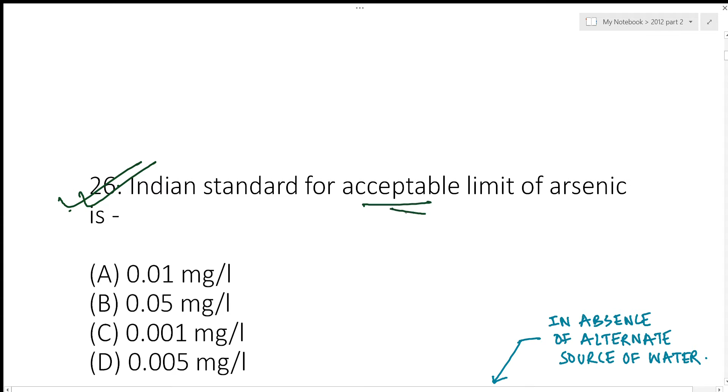The first question is: Indian standard for acceptable limit of arsenic is? The Indian standard acceptable limit is 0.01 milligram per liter for arsenic, and the permissible limit for arsenic is 0.05 milligram per liter. There are two limits in Indian standards: one is the acceptable limit and the other is the permissible limit. Only in absence of alternate sources of water is the acceptable limit relaxed to the permissible limit.

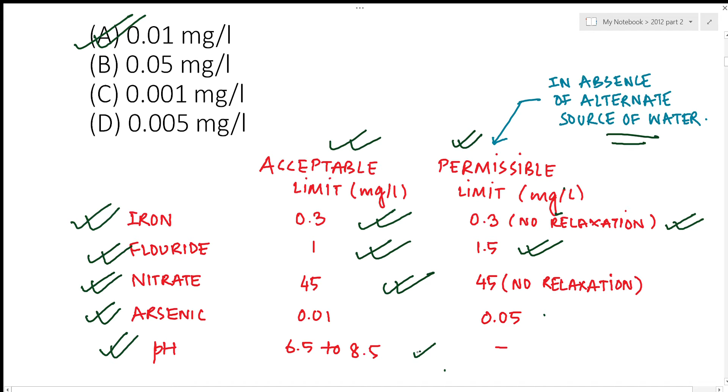For iron, the acceptable limit is 0.3 milligram per liter, and the permissible limit does not have any relaxation. In case of fluoride, the acceptable limit is 1 milligram per liter and the permissible limit is 1.5. For nitrate, it is 45 milligram per liter in both cases. And for arsenic, you already know. For pH, the acceptable limit is 6.5 to 8.5, and there are no relaxations for the permissible limit.

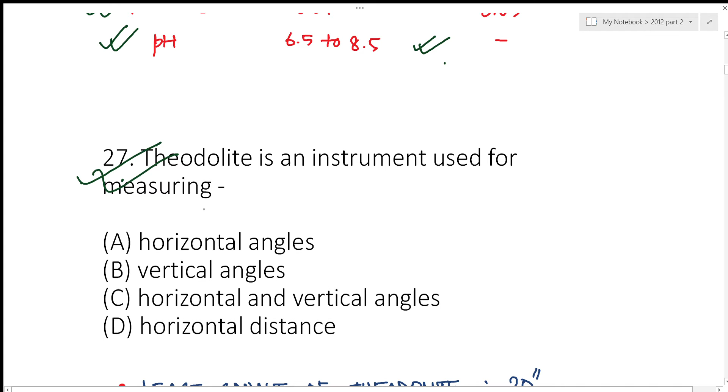The next question: theodolite is an instrument used for measuring? Theodolite is an instrument used for measuring both horizontal as well as vertical angles. The answer should be C.

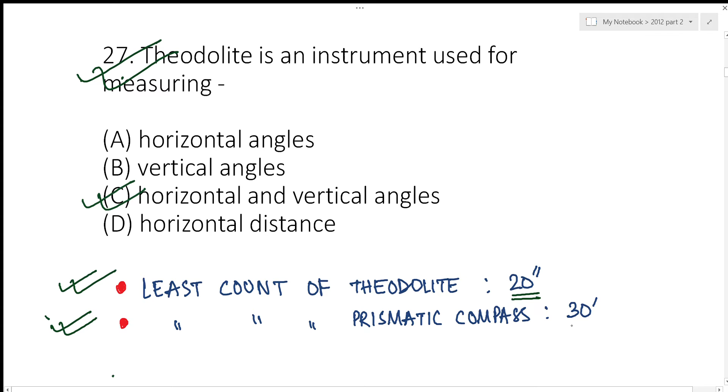A connected question from theodolite is: what is the least count of theodolite? The answer is 20 seconds. Also, the least count of prismatic compass - you should know this - the least count of prismatic compass is 30 minutes.

The next question: while submitting the tender, the contractor is supposed to deposit some amount with the department as guarantee of this tender, which is known as? The answer should be earnest money.

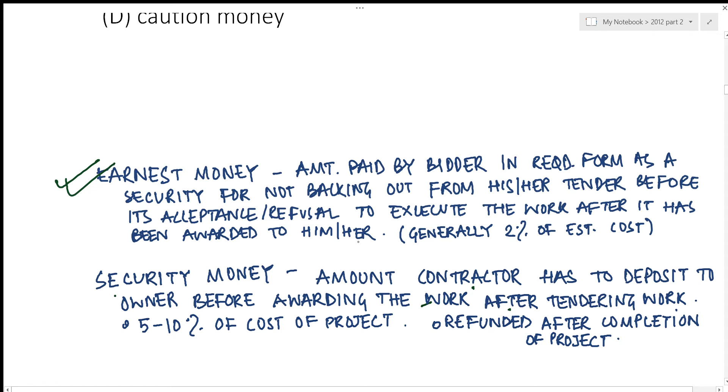Now let's go into details about earnest money and security money. Earnest money is the amount paid by the bidder in required form as a security for not backing out from his or her tender before its acceptance, or refusal to execute the work after it has been awarded to him or her. Generally, it is 2% of the estimated cost of the project.

Also, what is security money? Security money is the amount the contractor has to deposit to the owner before awarding the work after the tendering process, and this is around 5 to 10% of the total cost of the project. This money is refunded after completion of the project, but if the owner does not find the work satisfactory, this amount is not refunded to the contractor.

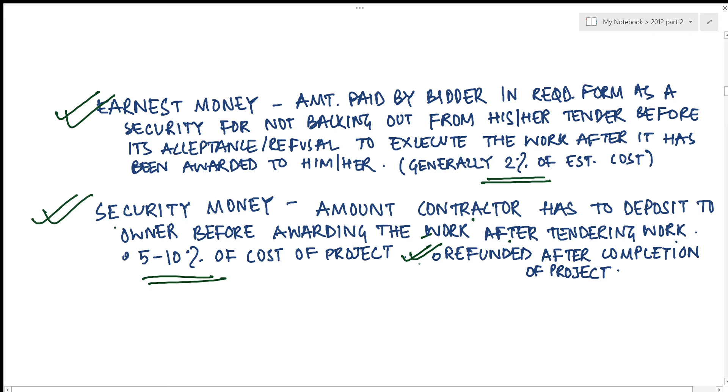Next question: an external corner in brick masonry is called? The answer should be quoin. The external corner in brick masonry is called quoin.

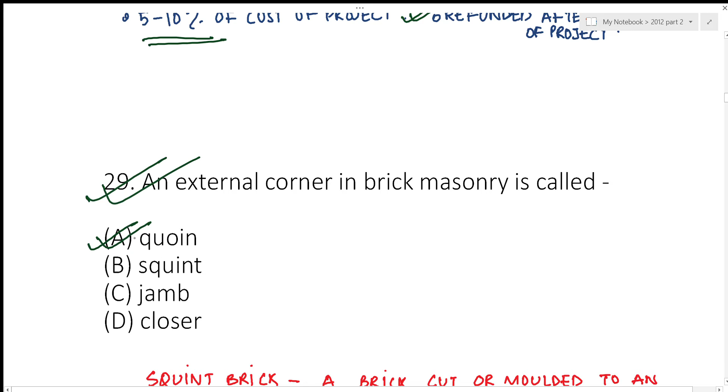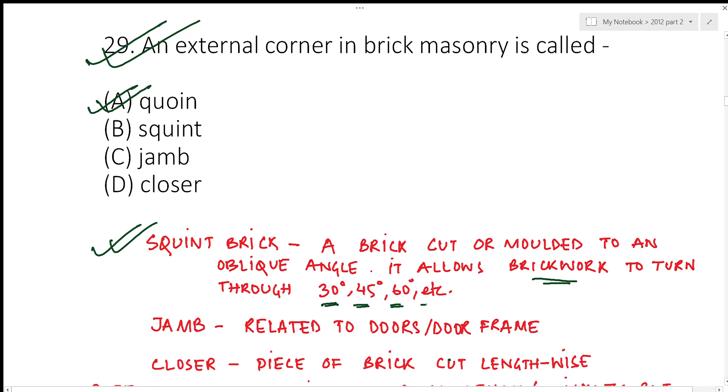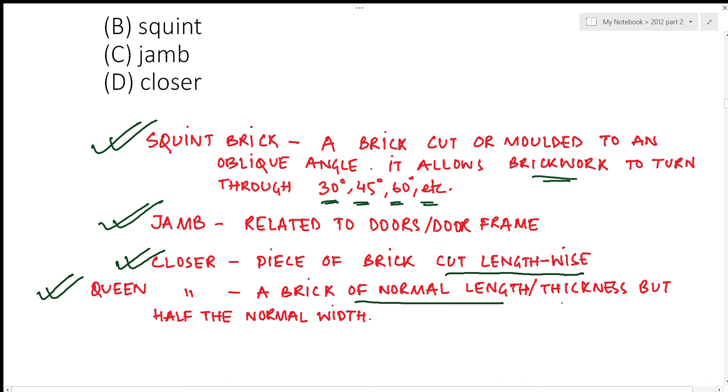Now let's look into the other options as well. Squint brick: a squint brick is a brick cut or molded to an oblique angle; it allows the brickwork to turn through 30 degrees, 45 degrees, 60 degrees, etc. Jamb: jambs are related to doors and door frames. Closer: a closer is a piece of brick cut lengthwise. A special type of closer is known as a queen closer, which is a brick of normal length and thickness but half the normal width.

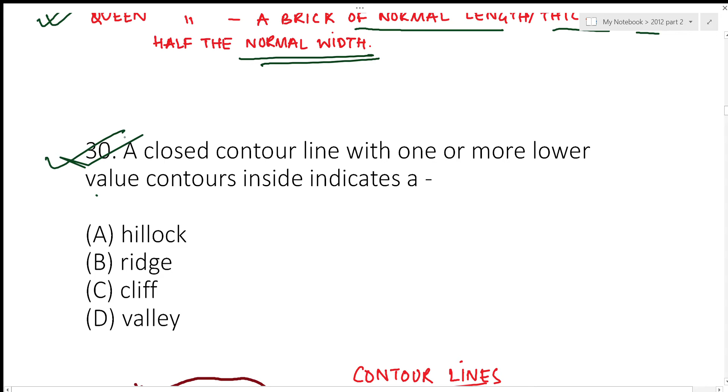The next question: a closed contour line with one or more lower value contours inside. Now, what are contour lines? Contour lines are lines joining points of equal elevation. So, this represents a contour line, and all the points here have an elevation of 84 meters. In this case, it is 82 meters.

All these points have equal elevation.

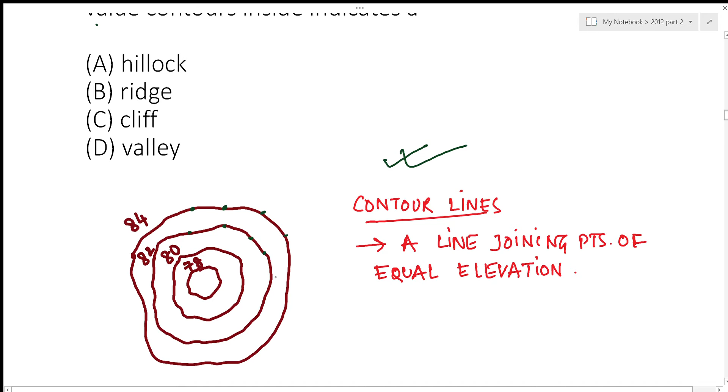The question asked is a closed contour line with one or more lower values inside. The value decreases inwards. In this case, it is a valley. And if the value increases inwards, then it would be known as a hillock or a hill.

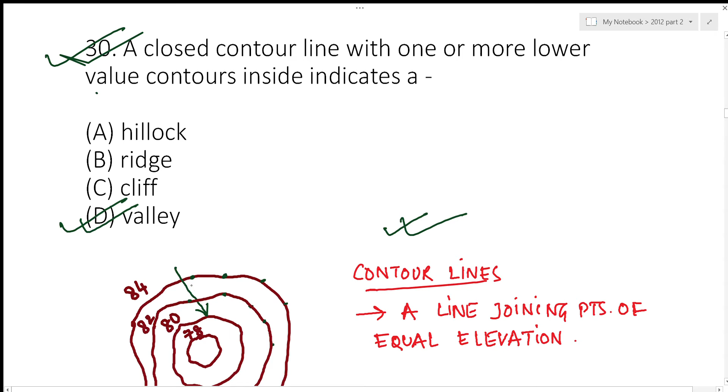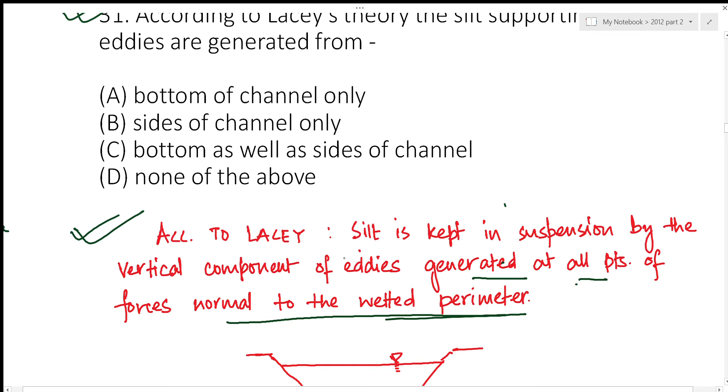The next question is, according to Lacey's theory, the silt supporting eddies are generated from. According to Lacey, silt is kept in suspension by the vertical component of eddies generated at all points of forces normal to the wetted perimeter. So, according to Lacey, the eddies are created by the bottom as well as the sides of the channel.

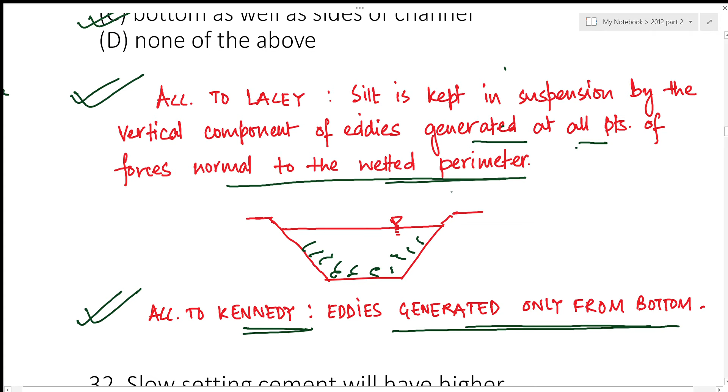Also remember, according to Kennedy's theory, eddies were generated only from the bottom. This is a major difference between the two theories, Lacey's theory and Kennedy's theory. According to Kennedy, eddies were generated only from the bottom, and according to Lacey, the eddies were generated from the wetted perimeter, or from the sides and bottom of the channel.

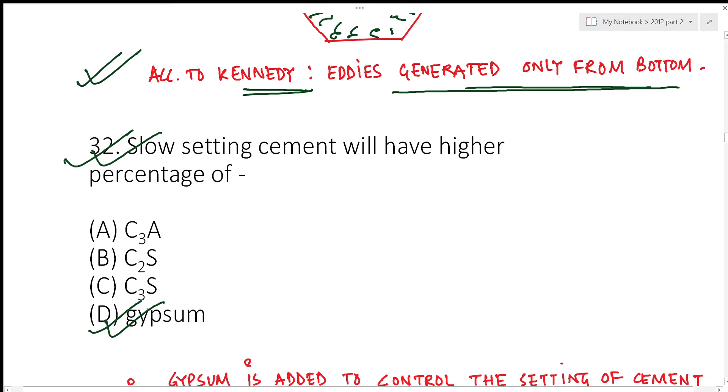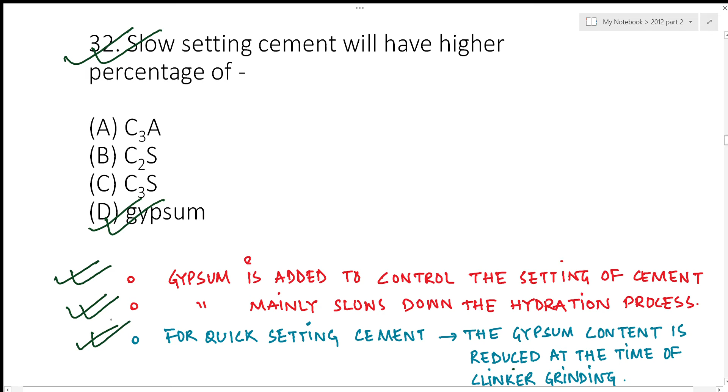The next question is, slow setting cement will have a higher percentage of gypsum. Gypsum is added to control the setting of cement, and it is mainly used to slow down the hydration process. For quick setting cement, the gypsum content is reduced at the time of clinker grinding. And for slow setting cement, the gypsum content is increased.

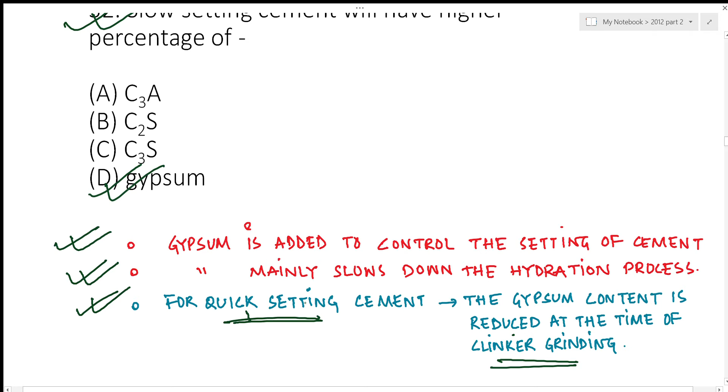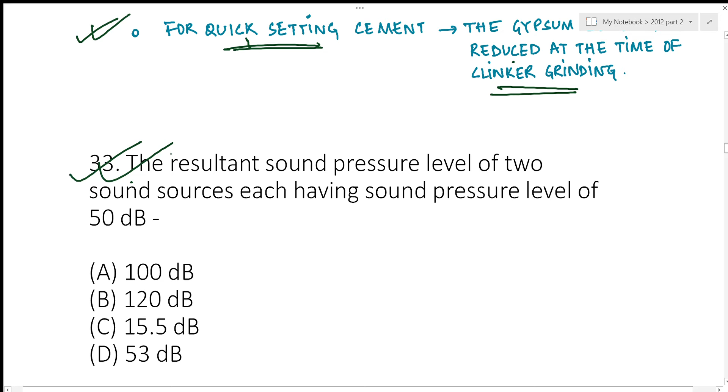Next question is the resultant sound pressure level of two sound sources, each having sound pressure level of 50 decibels. If you remember this formula, L equivalent is given by 10 log to the base 10 of 10 to the power L1 by 10 plus 10 to the power L2 by 10. Here, L1 is 50 dB and L2 is 50 dB as well. If we solve the equation, the answer would be 53.01 decibels, and the nearest answer is 53 decibels, which is D.

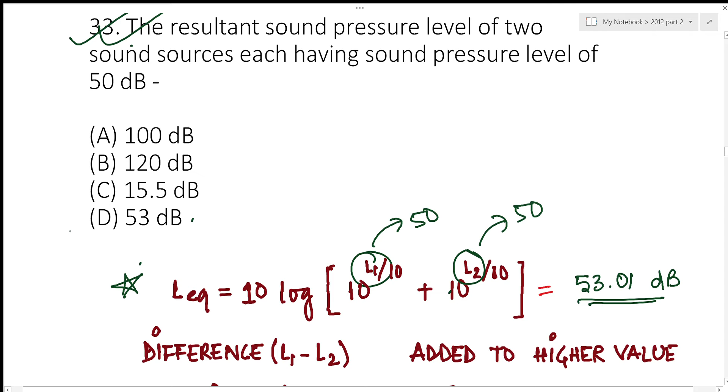Also, if you don't remember this formula, you can remember this chart. If the difference between the two sound levels L1 and L2 is 0 or 1, then you can add 3 to the higher value. If the difference is 2 or 3, then you add 2 to the higher value. If the difference is 4 to 8, then you add 1 to the higher value. And if the difference is equal to or more than 9, then you should not add anything.

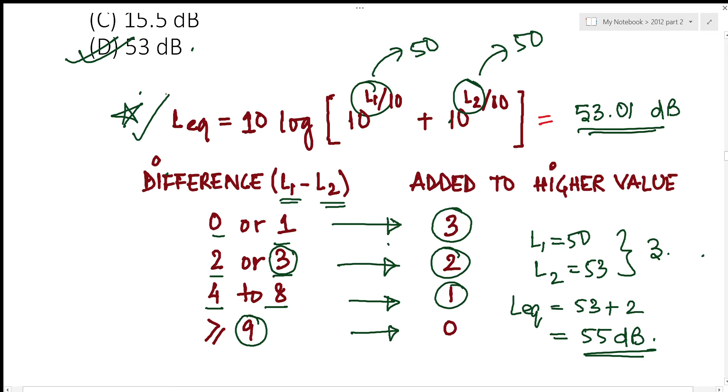Let's take an example. If L1 is 50 and L2 is 53, the difference between the two sound levels is 3. So if the difference is 3, you should add 2 to the higher value. Here the higher value is 53, so you add 2, and the answer comes out to be 55 decibels. So if you don't remember the L equivalent formula, you can follow this chart and easily solve the questions that would be asked.

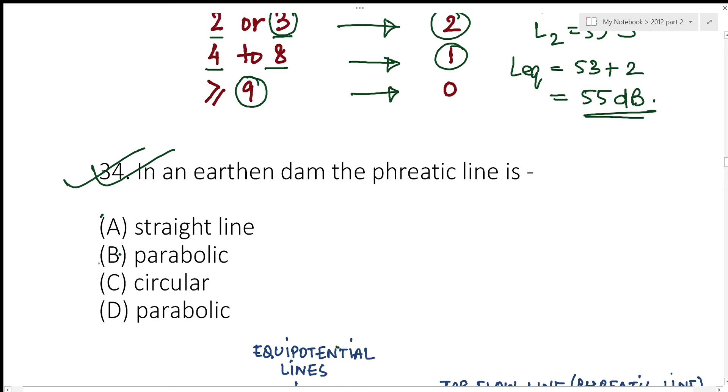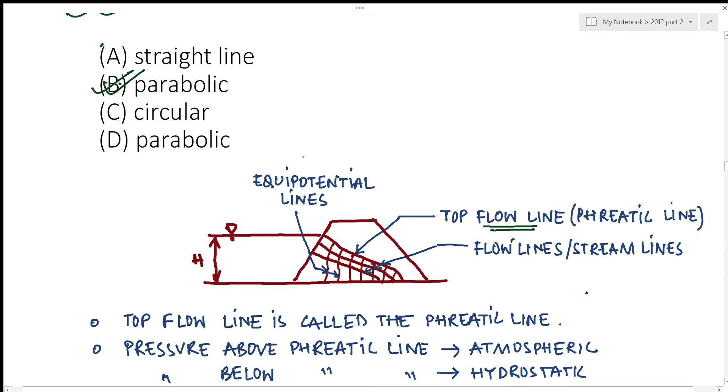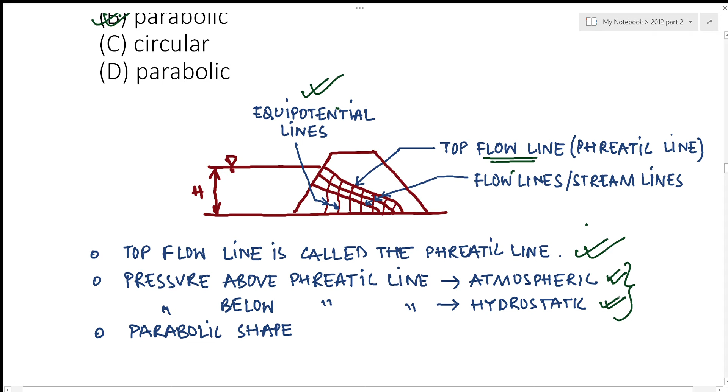The next question is, in an earthen dam, the phreatic line is parabolic. This is an earthen dam and these are the flow lines, and the top flow line is known as the phreatic line. Also, orthogonal to the flow line is known as the equipotential lines. This is very important: pressure above the phreatic line is atmospheric, and pressure below the phreatic line is hydrostatic. And of course, the phreatic line is parabolic in shape.

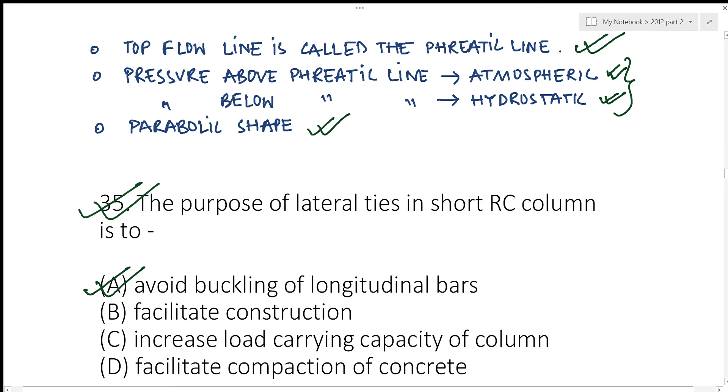Next question is, the purpose of lateral ties in a short RC column is to avoid buckling of longitudinal bars. Also, the other purposes of lateral ties are to prevent buckling, for confinement of concrete, to hold the longitudinal reinforcement in position, and to enhance the resistance against shear and torsion. So these are the four other purposes of lateral ties.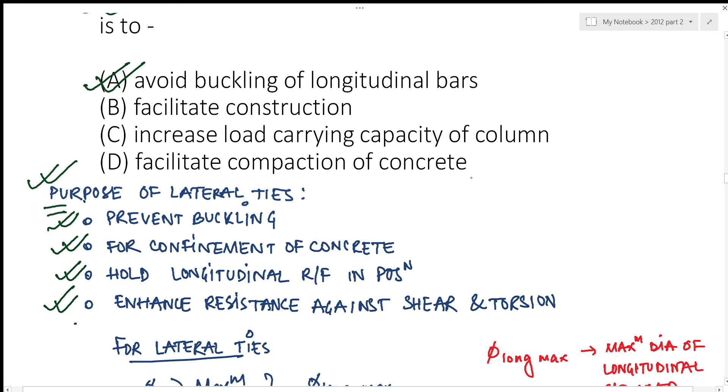Also, for lateral ties, the diameter of lateral ties should be greater than or equal to the maximum of phi longitudinal max by 4, or 6 millimeters, whichever is maximum.

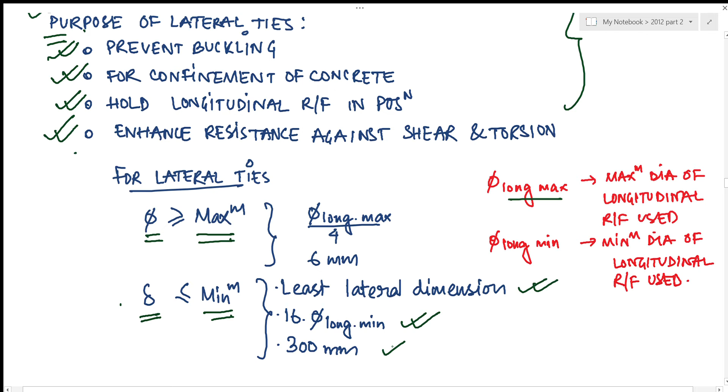Phi long max is the maximum diameter of longitudinal reinforcement used. The spacing between the lateral ties is given as less than or equal to the minimum of: least lateral dimension, 16 times phi long minimum, or 300 millimeters, whichever is minimum out of these three.

The next question is, rapid curing cutbacks are produced by dissolving straight run bitumen in what? The answer is naphtha.

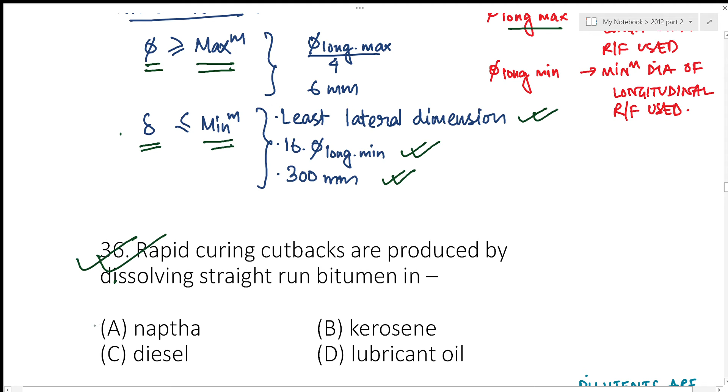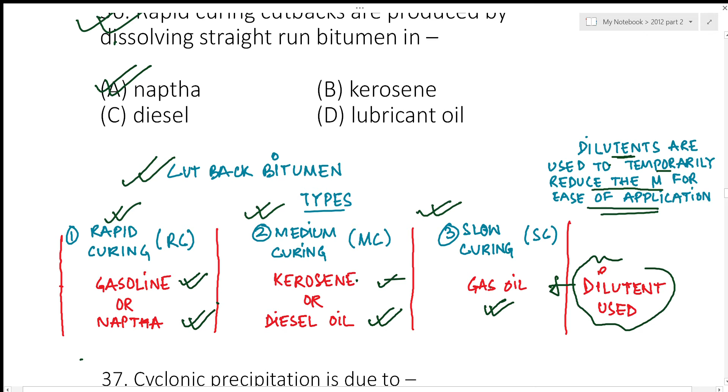For rapid curing bitumen, cutback bitumens are of three types: rapid curing, medium curing, and slow curing. In these three types, dilutants are added to temporarily reduce the viscosity for ease of application. For rapid curing, gasoline and naphtha are added. For medium curing, kerosene or diesel oil is added. And for slow curing, gas oil is added. So for any question from rapid curing, medium curing, or slow curing, if you know this chart, you would be able to answer.

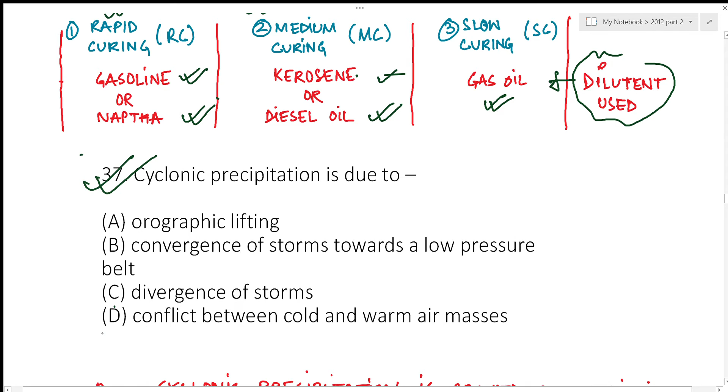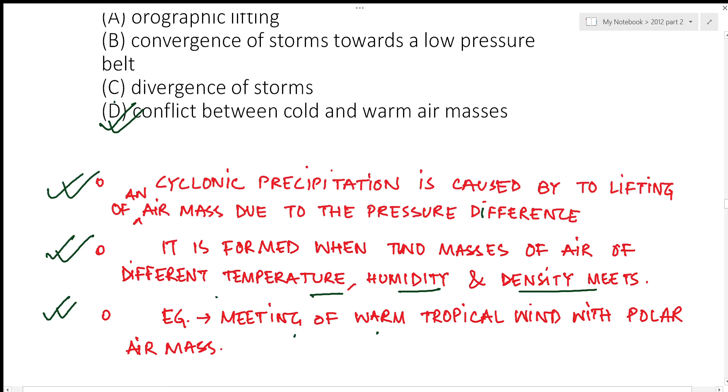Next question: cyclonic precipitation is due to what? The answer should be conflict between cold and warm air masses. Cyclonic precipitation is caused by lifting of an air mass due to pressure difference, and it is formed when two masses of air of different temperature, humidity and density meet. For example, meeting of warm tropical wind with polar air mass will result in cyclonic precipitation. So the answer is cyclonic precipitation is due to the conflict between cold and warm air masses.

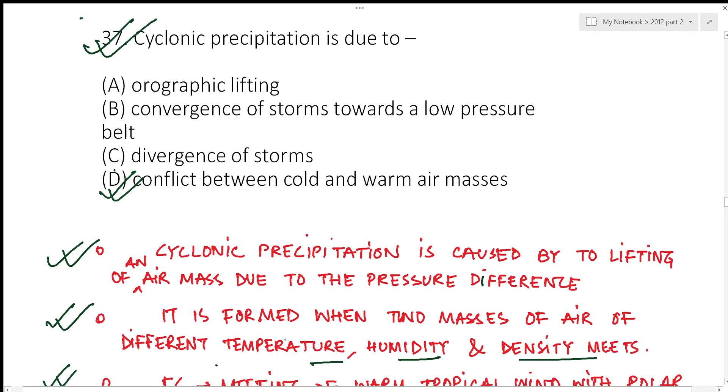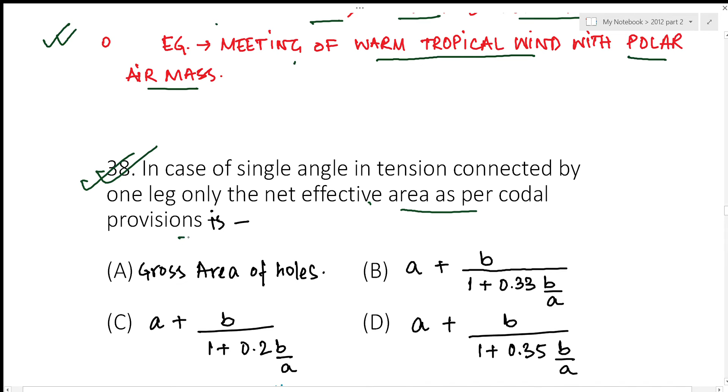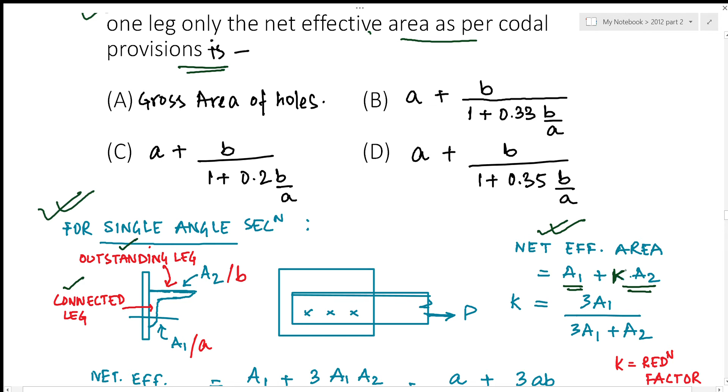K here is the reduction factor for the outstanding leg part. So the net effective area is also given by K equals 3 times A1 divided by 3A1 plus A2. So the net effective area is given by A1 plus K times A2, or 3A1A2 divided by 3A1 plus A2. Now according to the question, A1 here is small a and A2 here is small b. So replacing the values: A plus 3ab divided by 3a plus b.

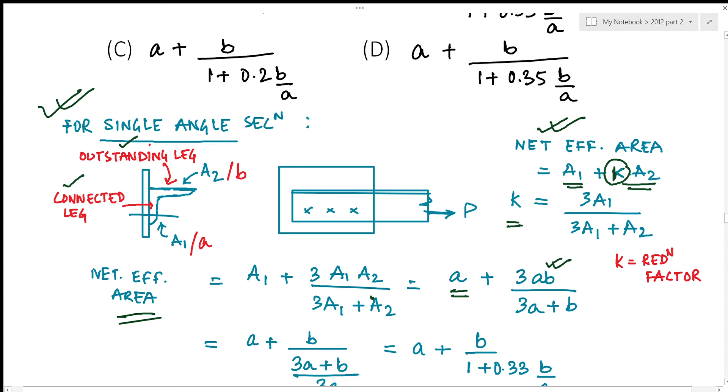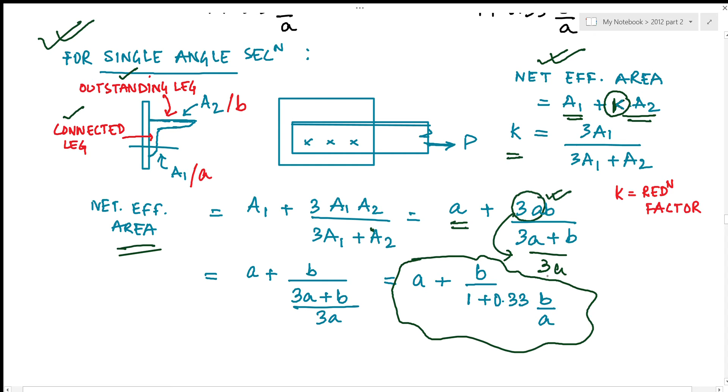Now we just need to rearrange these values. A plus b, we are just putting the 3a part here. So the equation simplifies to become A plus b, divided by 1 plus 0.33 times b by a, since 3a divided by 3a is 1, and b divided by 3a becomes 0.33 times b by a. So the nearest answer for this particular question should be B: A plus b by 1 plus 0.33 b by a.

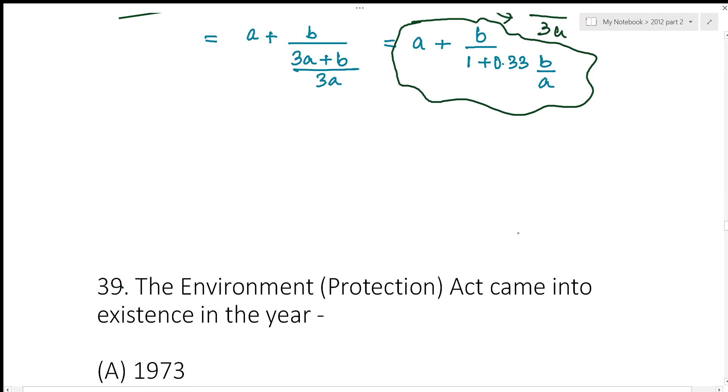The next question is, the Environment Protection Act came into existence in the year? The answer is 1986.

Bond strength in an RC beam can be increased most economically by using thinner bars but more in number. The other factors that influence bond strength are: the grade of concrete, and surface texture of reinforcement. Obviously, in case of plain and deformed bars, deformed bars have more bond strength. It also depends on the diameter of the bar. More bars of smaller diameter is preferable, because the surface area would be higher, so the bond strength would also be higher. Also, it depends upon the nominal cover.

So these are the factors which influence the bond strength.

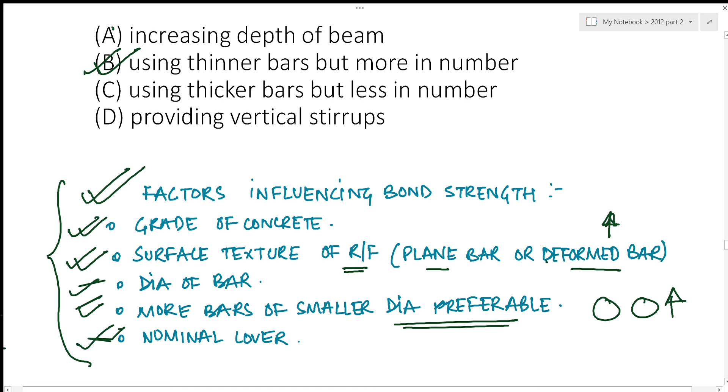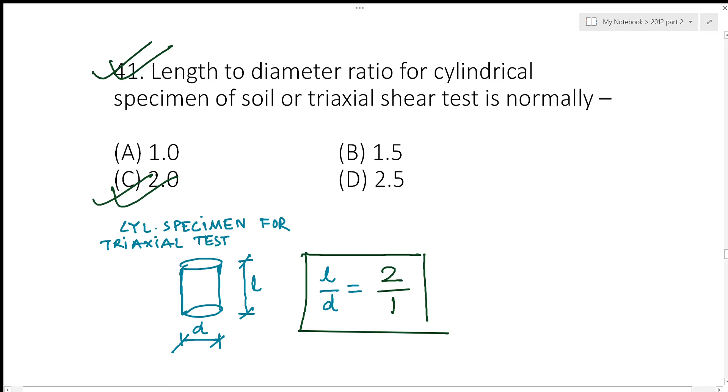Next question: length to dia ratio for cylindrical specimen of soil or triaxial shear test is normally 2 is to 1.

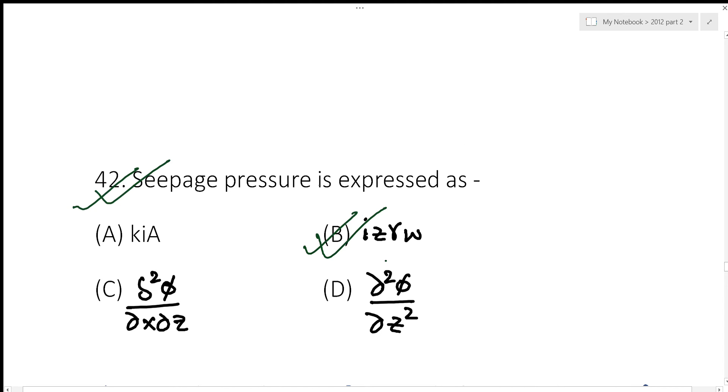Next question, seepage pressure is expressed as Iz gamma W. Seepage pressure is the pressure exerted by water over soil solids in the mass through which it percolates.

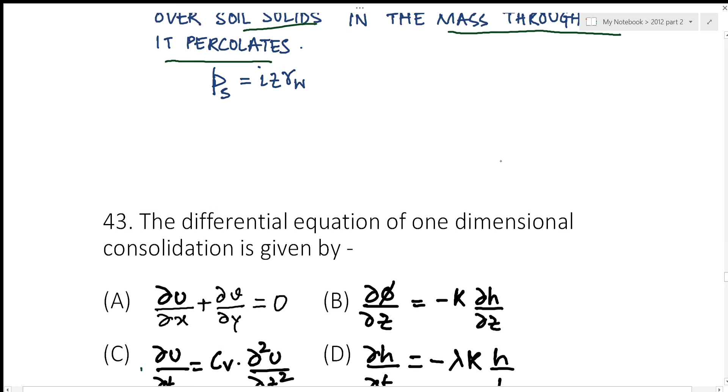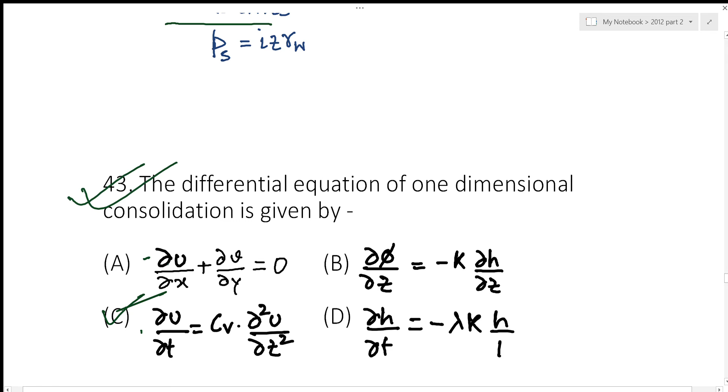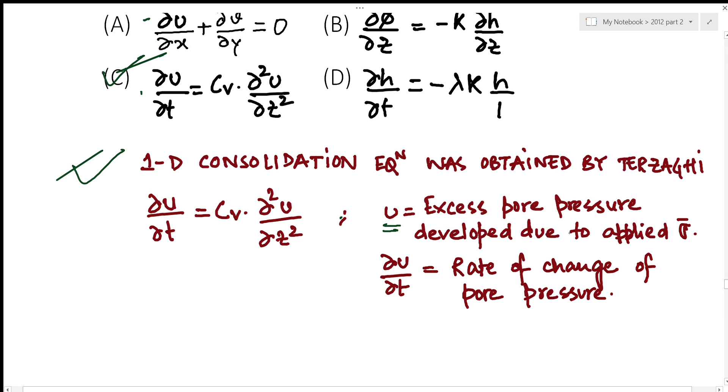Next question, the differential equation of one-dimensional consolidation is given by del U by del T equal to Cv times del square U by del Z square. This one-dimensional equation was obtained by Terzaghi, where U is the excess pore pressure developed due to the applied effective stress, and del U by del T is the rate of change of pore pressure.

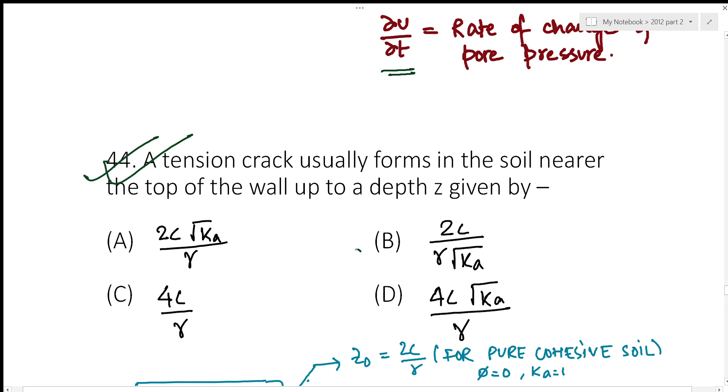Next question is, a tension crack usually forms in the soil nearer the top of the wall up to a depth Z given by 2c by gamma root Ka, where Ka is the coefficient of active earth pressure, C is the cohesion, and gamma is the unit weight of soil.

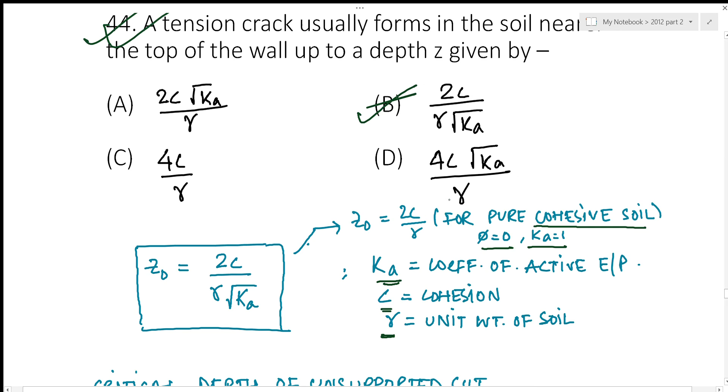Also, for pure cohesive soil, where phi is 0, Ka is 1, so the equation modifies to 2c by gamma. Also, the critical depth of unsupported cut is given by 2 times Z0, or 4c by gamma root Ka. This came in the year 2016 paper.

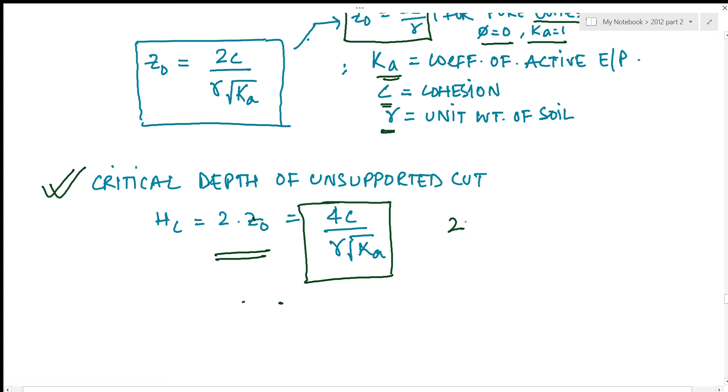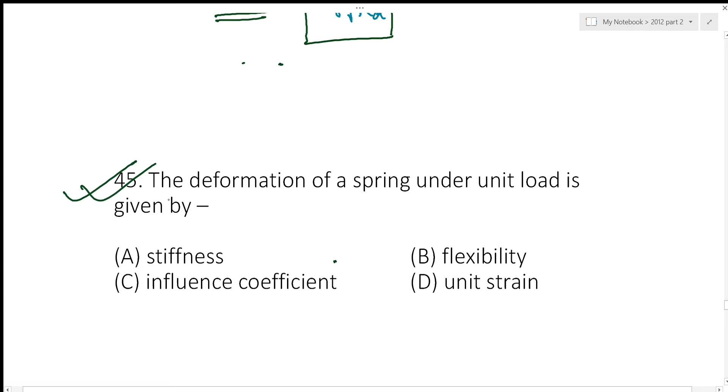Next question is, the deformation of a spring under unit load is given by flexibility.

Granite contains primarily quartz and feldspar.

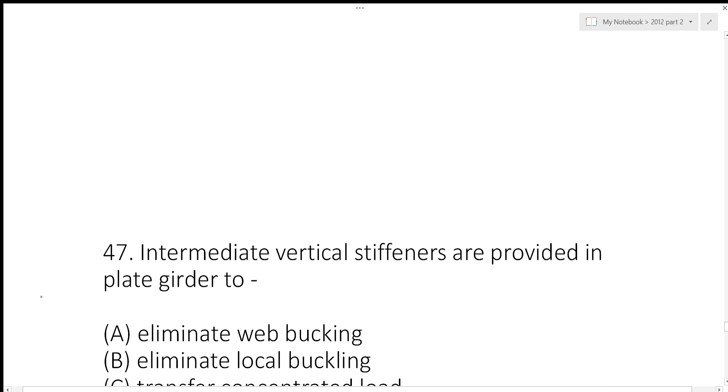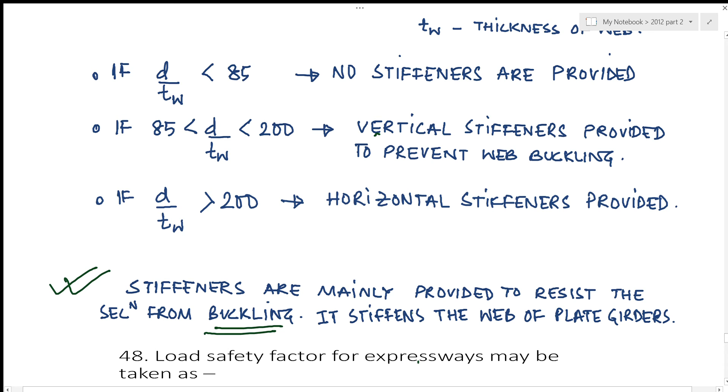Next question, intermediate vertical stiffeners are provided in the plate girder to eliminate web buckling. Stiffeners are mainly provided to resist the section from buckling; it stiffens the web of plate girders.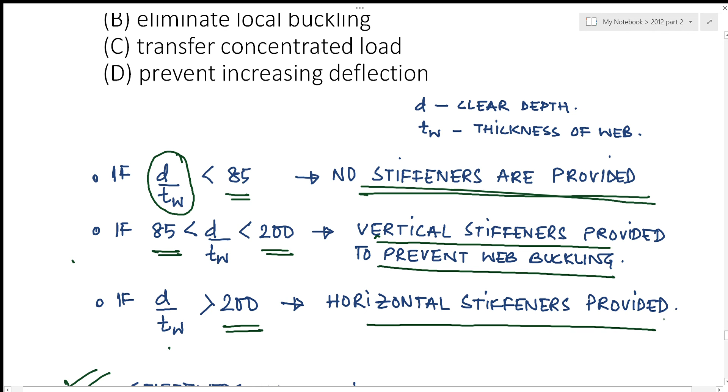When should we use stiffeners? If the depth to thickness of web ratio is less than 85, then no stiffeners are required. If the depth to thickness of web is from 85 to 200, then only vertical stiffeners are provided to prevent web buckling. When the depth to thickness ratio is greater than 200, horizontal stiffeners are also provided. These are things you can keep in mind; they might be asked in the examinations as well.

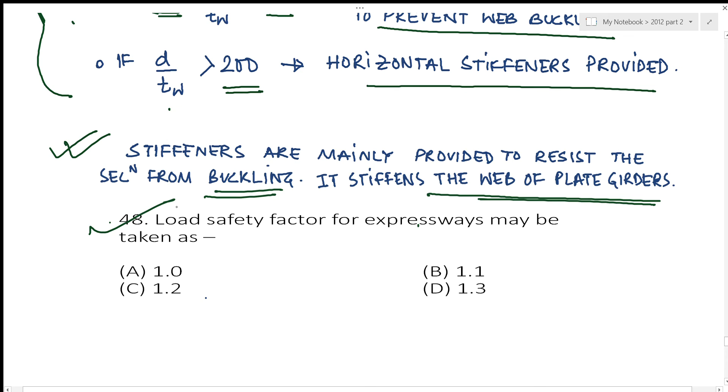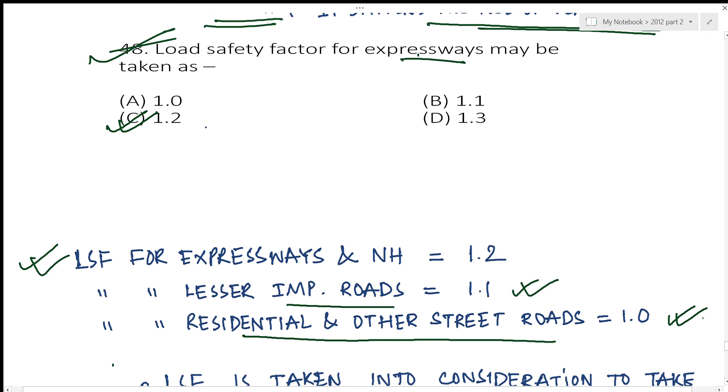Next question, load safety factor for expressway may be 1.2 for expressways and national highways. The load safety factor for lesser important roads is 1.1, and for residential and other street roads it is taken as 1. Load safety factor is taken into consideration to account for unpredicted heavy truck loads and high volume of truck traffic. The axle load should be increased by multiplying with the load safety factor.

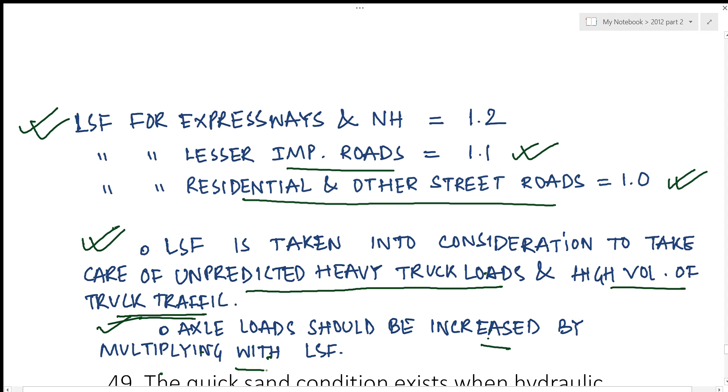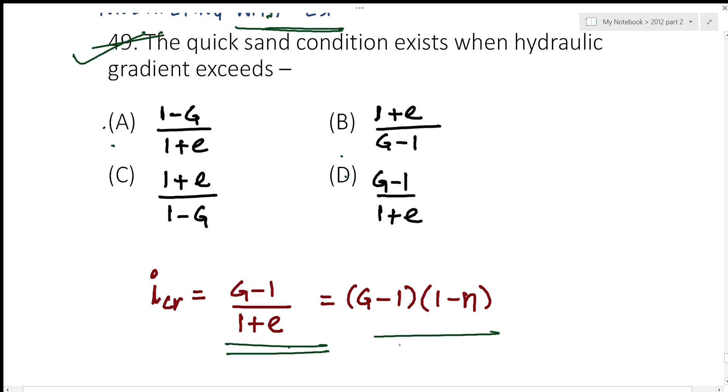Next question, the quicksand condition exists when hydraulic gradient exceeds the critical hydraulic gradient, given by G minus 1 by 1 plus E, or G minus 1 into 1 minus N.

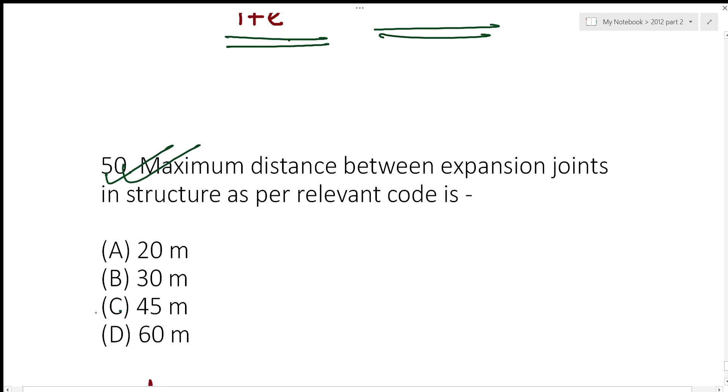The next question, maximum distance between expansion joints in structures as per relevant code is given by 45 meters. You can find this in IS 456-2000 clause 27.2. Structures exceeding 45 meters in length are designed with one or more expansion joints.

So this was part 2 of a 4-part series of WBPSC Assistant Engineer Civil 2012 paper. I tried my best to solve each and every question with detailed solutions and detailed answers.